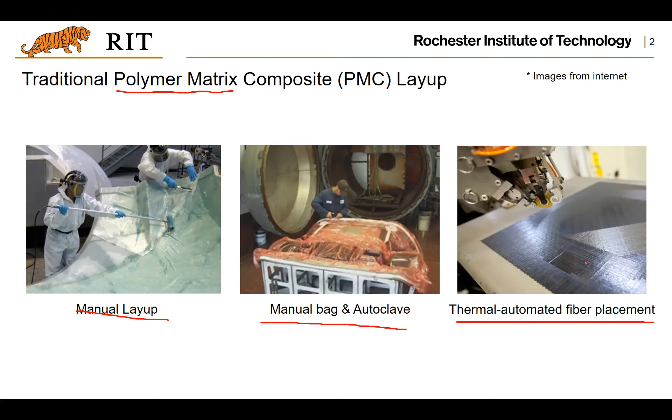Here shows you a thermal composite automated fiber placement. As you can see here, the robot is placing the fibers onto the substrate or the base material, base part.

But that's really difficult for making larger parts like the one shown here. Can you imagine there is a giant robot to do such a placement? That's not possible. And also there are other limitations for this automated fiber placement.

First of all, it only allows the placement of the fibers with limited turning radius, usually 20 to 100 centimeters.

Also, it is only useful for a simple core-skin geometry like the one shown here. That means it requires a core, right? Basically, you are wrapping the fibers onto the core.

But how about those components with a more bulk shape like the one shown here? That's difficult to make using that kind of placement. Basically, automated fiber placement is kind of wrapping the fibers onto some existing core. That indicates its limitation actually.

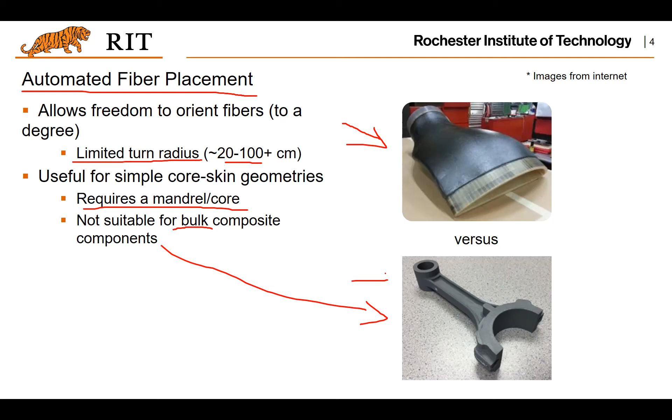So you cannot do parts, something like—where's my mouse? Yeah, okay, something like this. So that motivates the additive manufacturing based fiber placement.

But before that, let's look at some of the early work, which is the additive manufacturing of the cores. So as you can see here, these are the cores used in the automated fiber placement. Basically, you will need to wrap the fibers onto these cores, just a rough illustration like this.

And there are different types of cores. First of all, we have the washout cores. Basically, from the name, you can tell that that is removable, water-soluble 3D printed cores. So the material can be dissolved in water. Basically, you just print it and wrap the fiber on it, and then you could wash it out.

So that's the washout cores. And there are breakaway cores, and those cores could be manually removed after the wrapping of the fibers.

And there are other cores like these structural cores. Basically, these structural cores have very good mechanical property, strength and tensile stress, such that you can leave it inside the part. You don't need to remove it, and this kind of structural shape can be produced by additive manufacturing, and we can go through some details in later slides. Any questions so far?

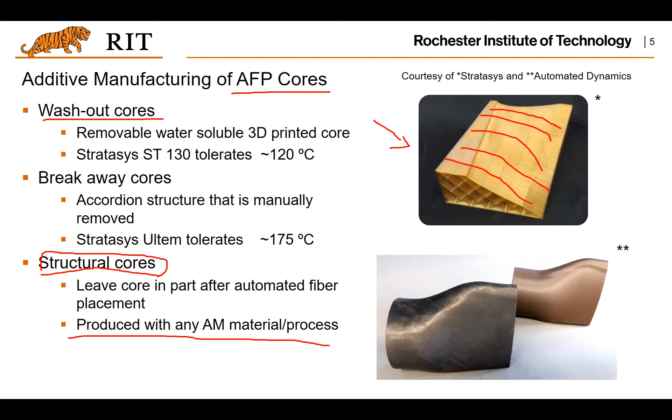No? Okay, good. Yeah, again, the structural geometries—I would say the most popular one is the so-called engineered lattice structure. As you can see here, this is a typical engineered lattice structure. Actually, it's the I-beam, and it is the alternative to the honeycomb cores.

And basically, there are different strut cross-section geometries. And in this kind of structure, this basic strut geometry will be repeated, and it repeats itself and forms a structural shape.

And here shows you some applications. Basically, you can embed these structures inside a geometry as the skin, and the interior structure together with the exterior skin will work together for a part. It has a long history for such kind of structure to be embedded in a given geometry.

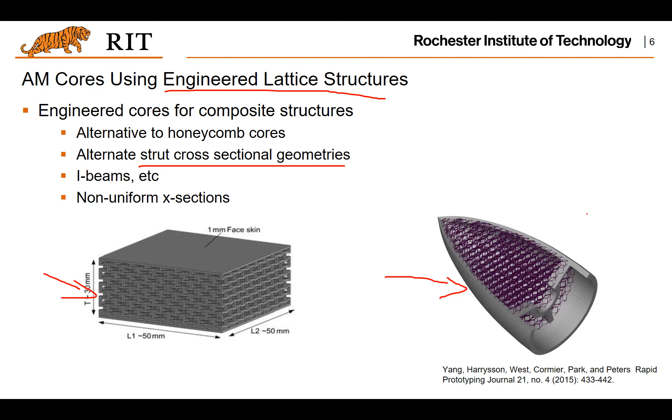Also, there are different unit cell geometries. Again, these cells repeat themselves to form a larger structure. And as you can see here, all different kinds of geometry are here. It could be utilized in many different applications.

And the mechanical property of such a lattice structure are governed by several factors, such as the geometry, right? Actually, it's the most important thing for these engineered lattice structures. So different cell geometry will give you different material property.

Also, the diameter or shape—by principle, if you have a thicker diameter for the strut, it will have a better mechanical property. Another parameter is the angles. You can make changes, for example, like this I-beam. You can change these angles, and by changing these, that could make a difference in terms of the mechanical property, and so on and so forth.

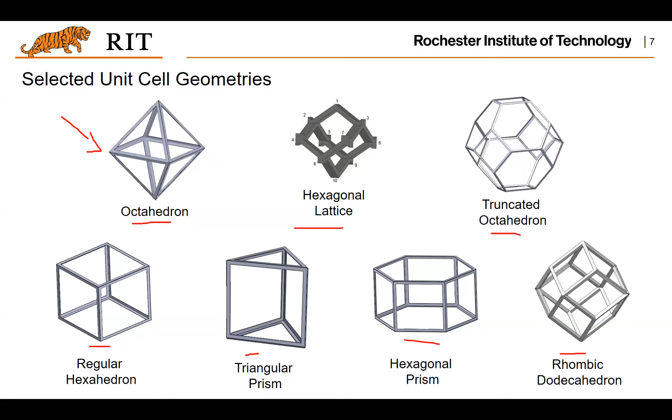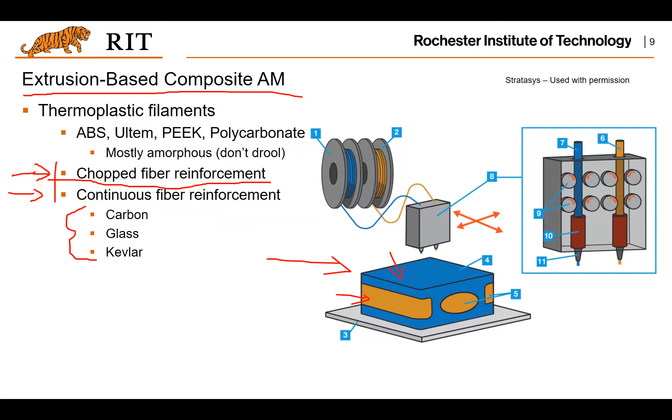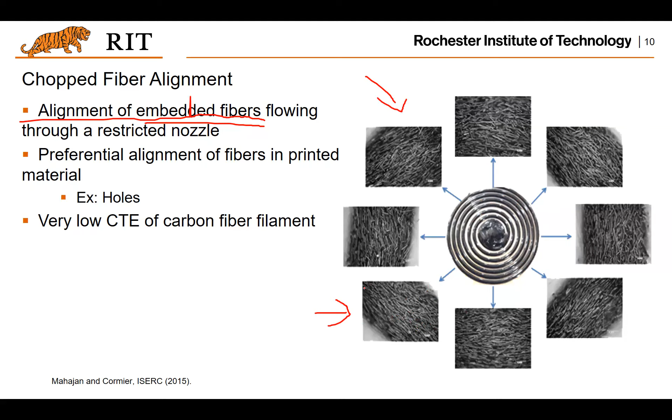If you zoom in, just imagine you can see through, you will see all these fibers are aligned with how the nozzle moves to create the shape. But if we look at this illustration again, it shows you how it is embedded. So then another question is how you're going to distribute the fiber, and also how you're going to decide what is the direction for the fiber to be aligned.

That is actually very important in terms of the mechanical property of the parts. But before that, there's another thing you want to be aware of: the critical fiber length. Why is this critical? Because it decides the minimum length of the fiber, such that if the actual fiber length is less than this critical length, the fiber will pull out of the matrix rather than breaking.

Because you have mixed two different materials together, you have the thermoplastic as the base and the fiber to be embedded in the base. How do you make them attach and adhere together, especially when load is applied? So you need to compute a length and make sure the fiber length is greater than or at least equal to this length, such that when you apply the load, the fiber will not be pulled out from the base material. That's the idea.

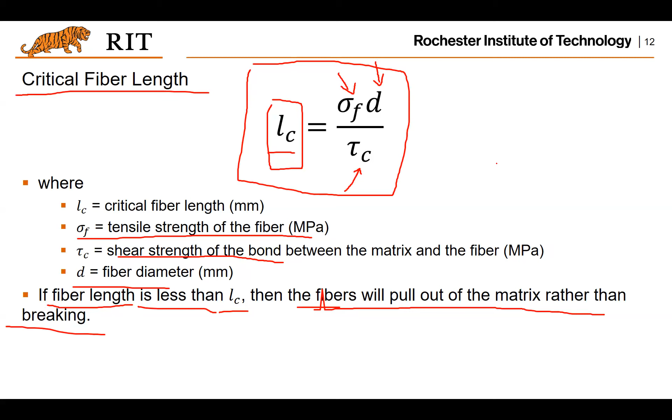Okay, let's move on. Another important thing is the orientation of the fibers, as I mentioned previously. Let's say this is the tensile axis, meaning the load will be applied along this axis. And the fibers are parallel to this tensile axis.

Then you will have the combined stiffness of the two materials' stiffness — the thermoplastic's elastic modulus and the fiber's elastic modulus — and you need to weight them with the volume fractions, meaning the ratio of the volume for both the thermoplastic material and the fiber material. That's how you get the overall elastic modulus, which is related to the stiffness of the composite material.

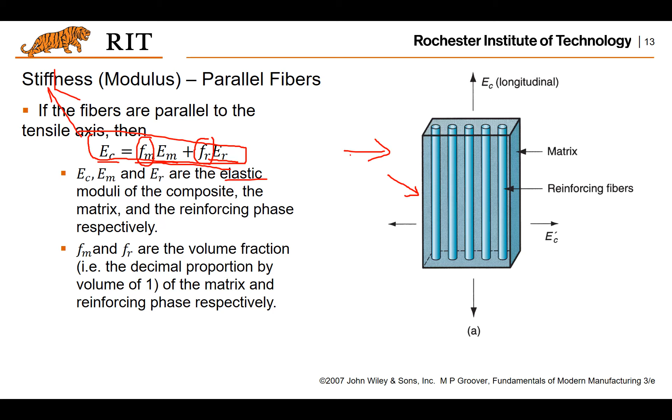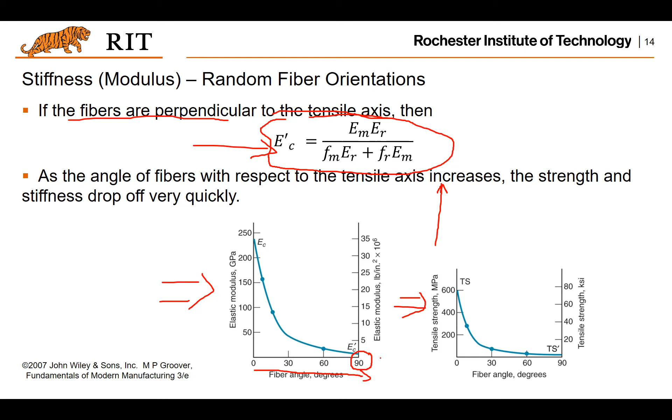So you need to be very careful when deciding the fiber orientation during the process. For example, if you have a turbine blade, you obviously want the tensile load axis to be like this, meaning you want your fiber oriented in this way as well. That gives you the suggestion of how to move your nozzle, because you want to align the chopped fiber orientation with the tensile axis. So can you tell me what's the way to move your nozzle when you build it? What's the building direction? Any idea?

Okay, so let's say you have the part like this, and you want your fiber to be oriented along this axis as well. That means you want to move your nozzle in this way too. So you can never build your part — let me redraw it, it looks a little messy. What I'm drawing are layers, just an illustration. That means you cannot build your part with the layers oriented like this. Instead, you want to build your part with the layers like this. Then the chopped fibers will be oriented along the tensile axis. Now you get it? Get it?

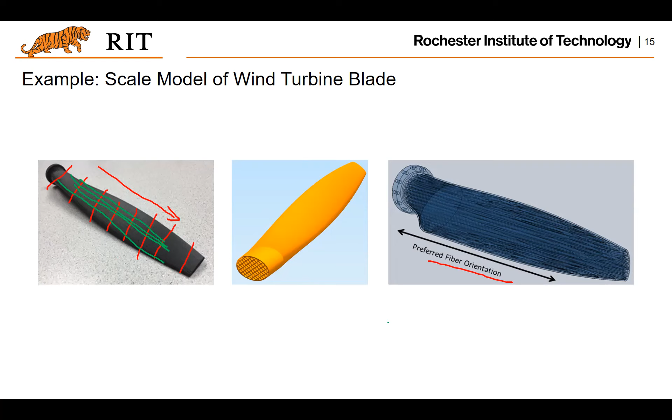Any other question regarding this? Okay, good. I mean, that's the thing you want to keep in mind if you have such an application.

Basically, this could be realized using the BAAM process, which is the big area additive manufacturing, where chopped carbon fiber together with the plastic pellet are mixed together during the process. Putting them together, you could build a big part with good tensile strength.

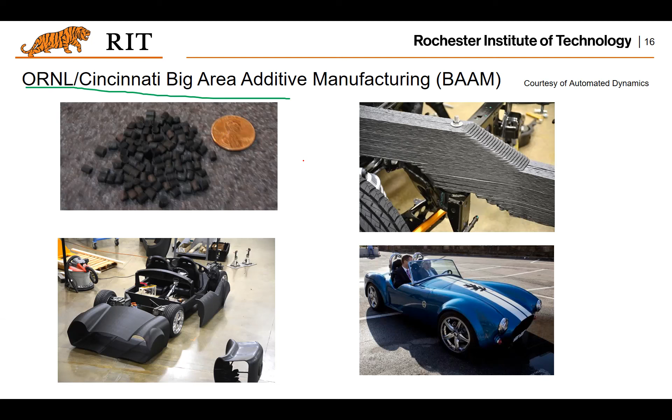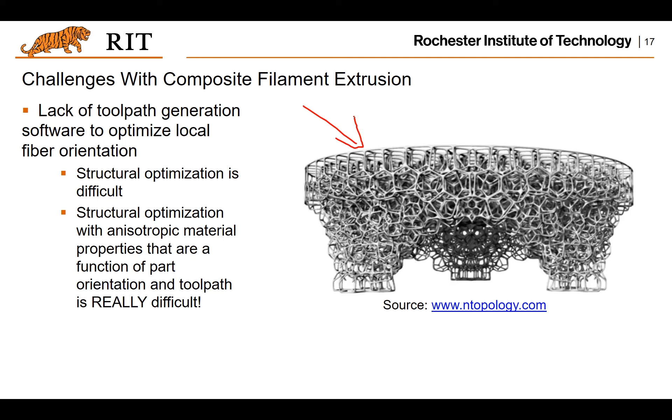Then how are you going to generate a tool path such that you have the best tensile strength? After all, what you can only do is run software optimizations, analysis software to figure out the stress distribution, right?

So in our case, that means you could make some fibers, put some fibers along this orientation during the process, and this will be reinforced to make sure it will not be broken if the load is applied this way. So that's how you could decide the fiber orientation.

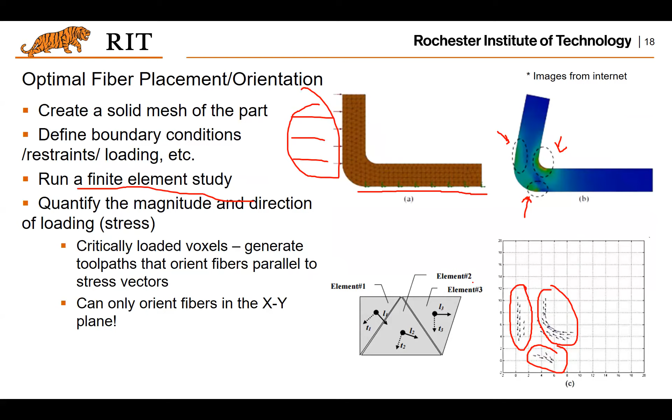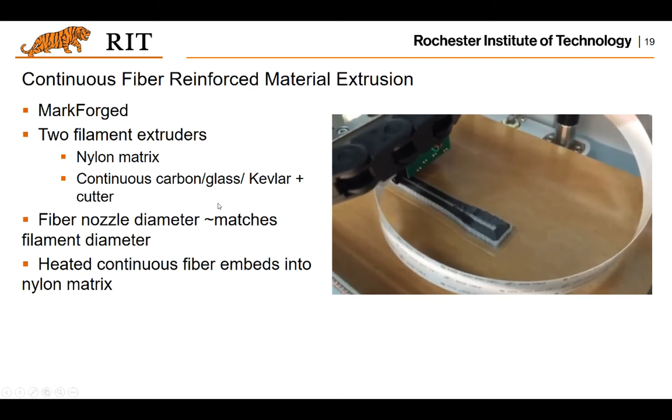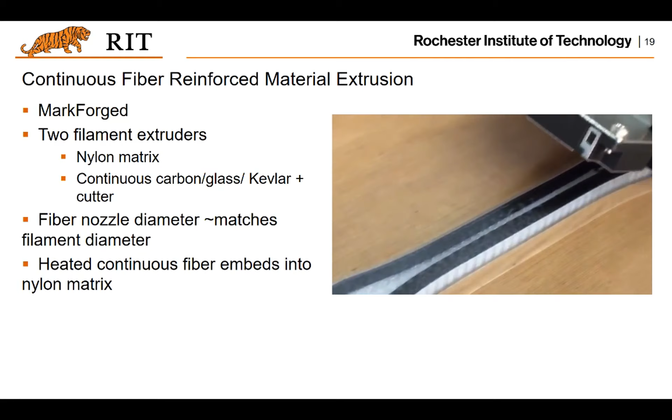And there will be a cutter after the embedment of the fiber is completed. The cutter will cut the fiber, and that's the way you could embed those continuous fibers during the printing process.

But this is not perfect. It only allows a very small turning radius, and the printing speed is very slow compared with automated tape layup. Because it has a small turning radius, compared to traditional auto tape layup, the Markforged process has very little advantage.

And also, again, it only works for 2D, right? Basically it embeds the fiber for each of the layers. So how about if you want to place your fiber along the z-axis? That will make this process have no possibility to achieve it.

And Markforged makes the process and their software closed to the users. That means you cannot really see how the G-code will look like and make changes to the G-code such that you could customize the tool path or fiber placement. I think the reason for them to do so is this process is not that robust if they allow you to make changes to the orientations of the fibers as well as the turning angles. So overall, it is still in the preliminary stage for this process.

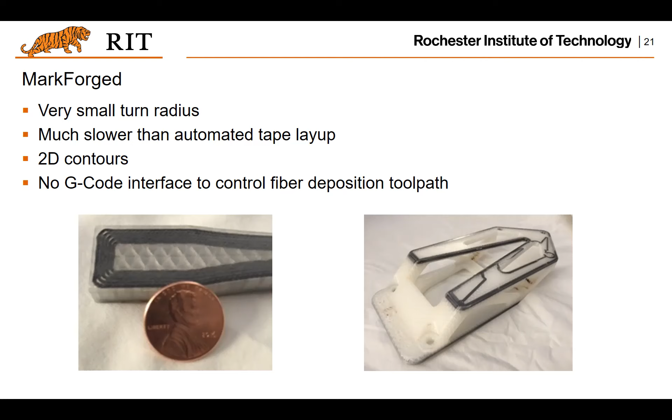So this is another process which embeds metal wires—in this case, copper wires—into the thermoplastic base. If you look at the part after this layer is completed, what you will see is copper wires embedded there. It's very preliminary, but the idea is similar to what Markforged does: print some base material and embed the wires into this layer. Then there will be a cutter, or you manually cut it, and then do the second layer, and so on and so forth.

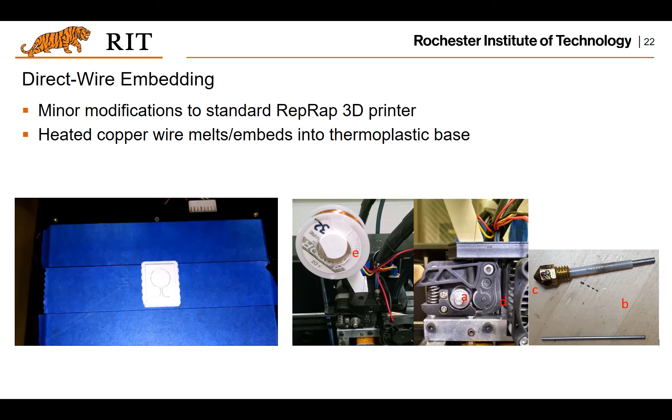So there are some other processes to also address the challenges of such a process. The biggest challenge here is the interlayer adhesion—meaning the bonding of the interlayer is not that good, especially for amorphous thermoplastics.

So this company basically came up with a solution: they have carbon nanotubes embedded during the process, and another step where microwave energy is applied during extrusion to fuse the material with the carbon nanotube together, such that the bonding between layers will be improved. According to their statement, this is how they work.

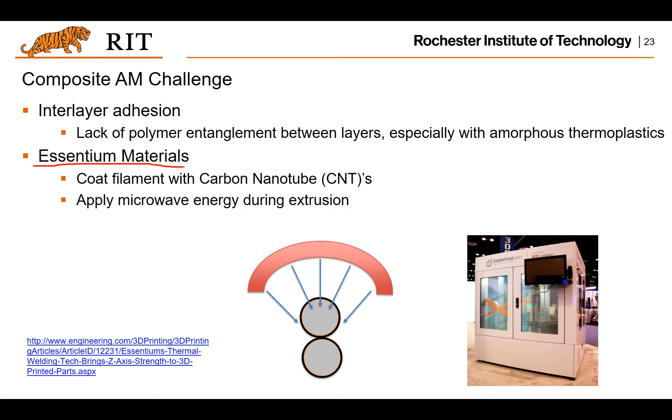So the current frontier, or the cutting edge technology, is the non-planar deposition. As we mentioned, for those complex geometry 3D shapes, the layer-by-layer process cannot satisfy the need to first create the geometry, and second, to place the chopped fibers or continuous fibers into the geometry. So the idea would be: how about we go with a non-planar process, something like this.

Let's look at the challenge first. If you look at this figure, here are some lattice structures—pyramid structures. Just imagine if you use the conventional AM process to produce it. For each of these struts, you are actually creating the geometry layer by layer, one after another. It has very poor interlayer adhesion because only part of the area will overlap between different layers.

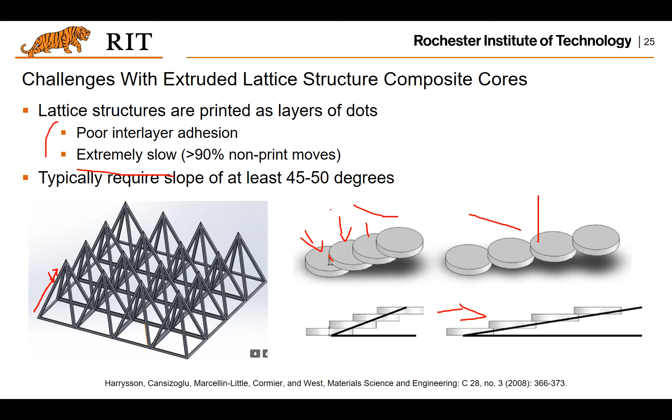So actually that is what people are looking at. This company is called Branch Technology, and they are making large size parts, like house or home constructions. They use robots to extrude these materials and structures. As the robot has multiple degrees of freedom, they will extrude those struts along its axis.

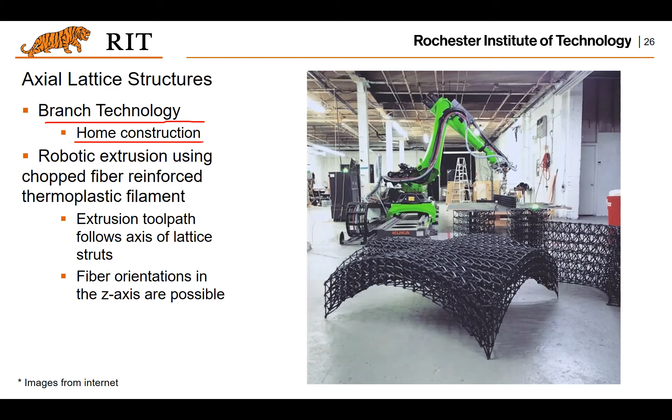It also enables fiber placement—meaning the orientation of the fiber placement is not just in the XY plane, but also in space, in the Z direction, or in any 3D direction, just by extruding along the axis of the lattice struts. So they are able to create geometry like this at a larger scale compared to most 3D printing processes.

Actually, there are some challenges for the process. The first one is slumping—meaning if you print one axis and then another, how do you prevent it from falling down during this process? To prevent this slumping, you probably want to cool down what you just printed before you print another part to join them together, so you want to do the cooling during the process. That's another challenge.

The third challenge is the collision of the nozzle with the previously printed part. I will show you some figures so you can better understand how these collisions could occur.

So let's look at this illustration. If you have an extruder like this and you want to print those struts, first you print a filament onto the platform, and then you extrude your part in this direction. At the same time, cold air is applied to cool down the part and make it solidify. It keeps cooling this part to make it stronger while the extruder is printing another bar to form this geometry. Turns out you will have some lattice structure or some pyramid structure created.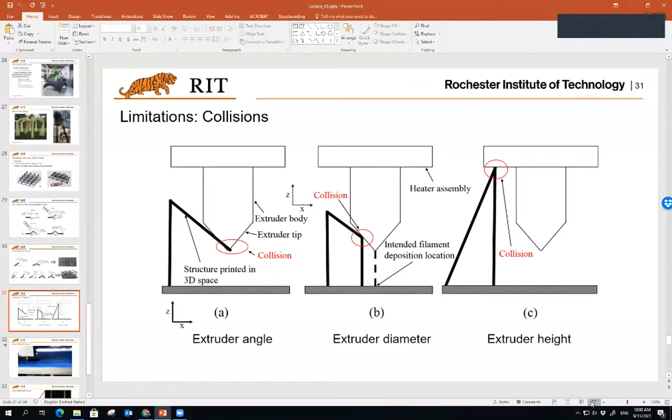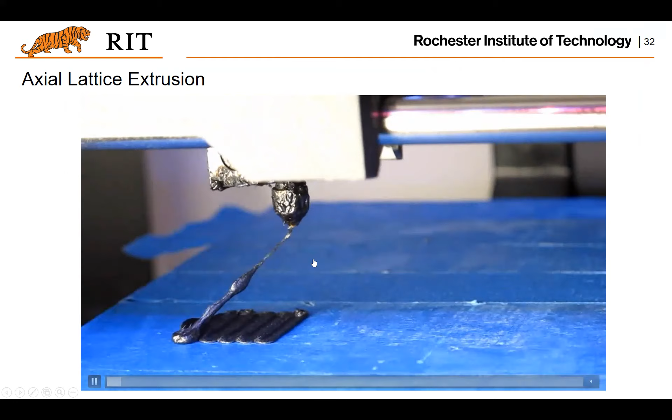All right, let's continue. So what this could be realized, as I mentioned, is doing this kind of multi-pass process instead of continuously moving your nozzle to create this geometry.

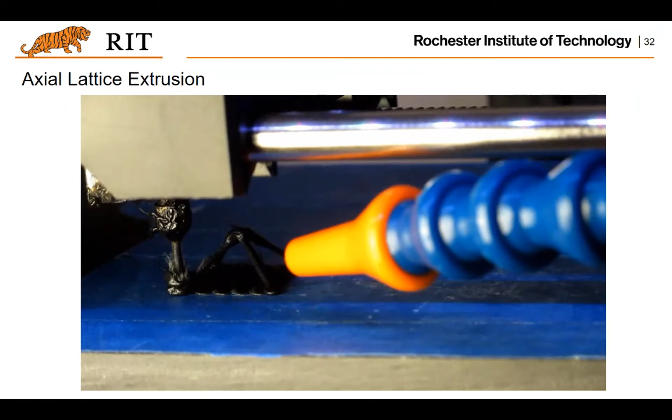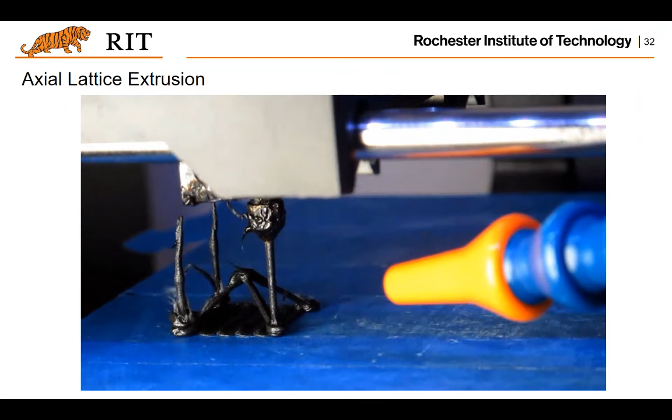As you can see here, this printer is creating a complete unit cell, and it always goes ascending instead of descending. During the process, there's always cool air applied to solidify the printed strut.

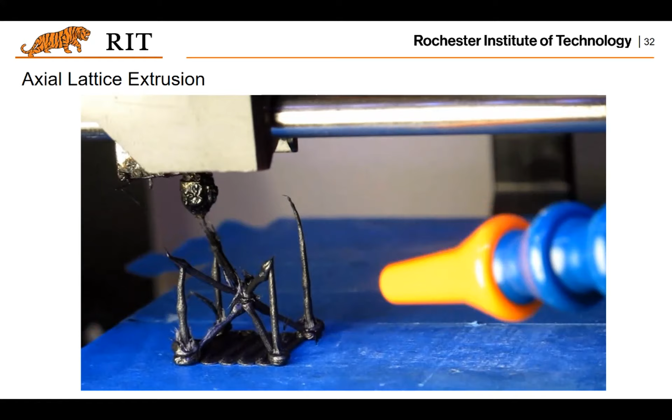I think this video was taken by Dennis Cormier's students, and this shows how this process is creating some lattice structures as well as a skin.

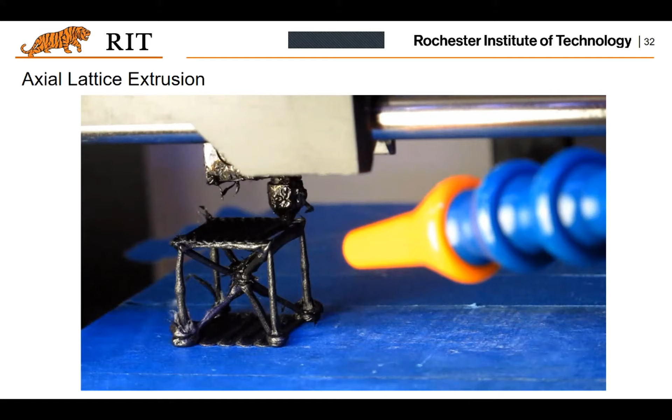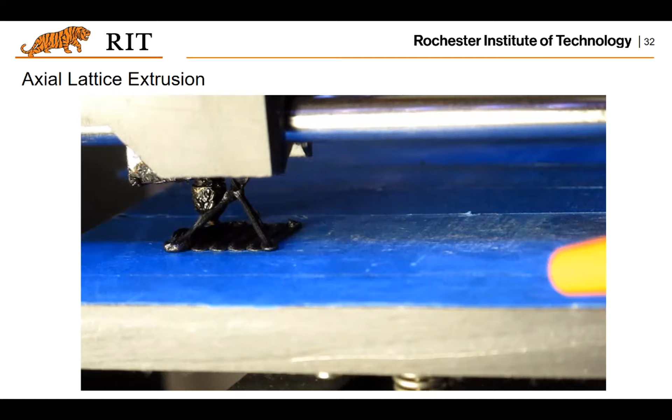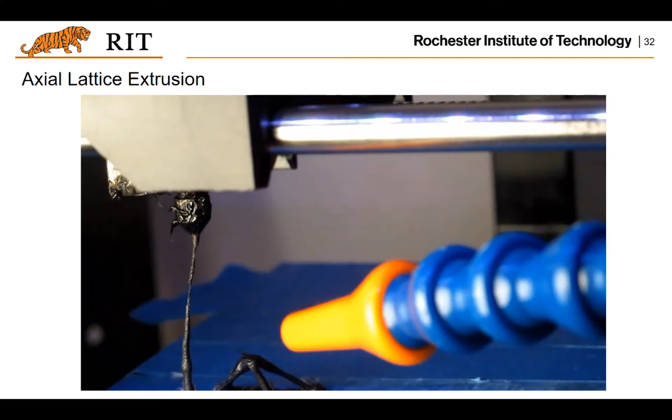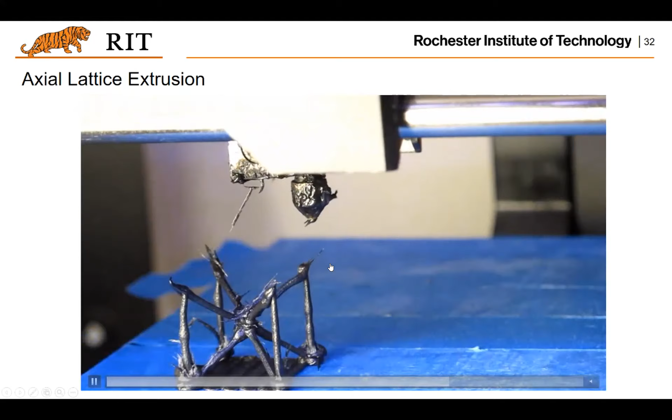I'm curious if the cool air is provided automatically or manually. I think in this case it's not an automatic process, but definitely it's possible to provide it. I think right now they make this automated, but when taking this video it was not. And it's not difficult to make it automated - basically what you want to do is attach this part with your nozzle, and in the control side, just decide once one bar is created, let the cool air out onto the parts. That's how it could be automated.

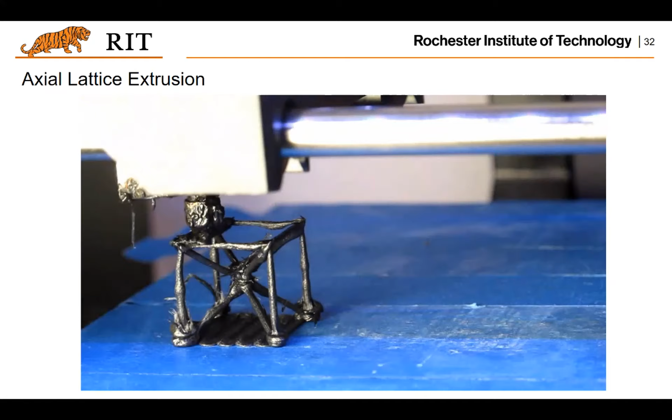So as you can see here, the orientation of the fiber - if you look at this zoom-in view, you can see it is perfectly aligned with how you move your nozzle, which is the direction of this axis of the bar. And that achieves our requirement.

And if you compare the printing time for these examples, as you can see here, this axial lattice extrusion is much faster than the conventional fused deposition modeling.

For printing, two examples: one is a 3x3x1 lattice, another one is a 3x3x3 lattice block. That's how you should think of this new process compared to fused deposition modeling, the conventional one, when printing these engineered lattice structures.

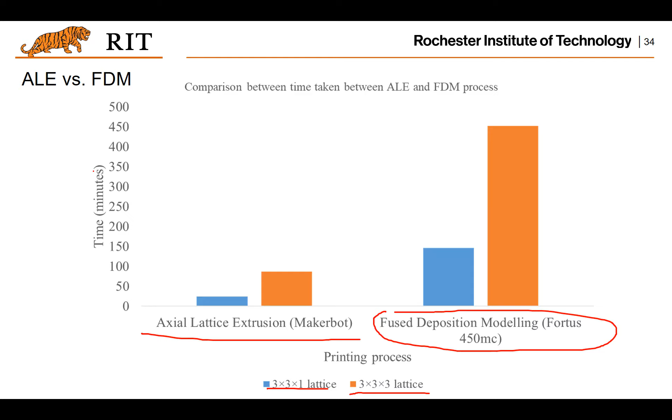I think we have completed the introduction of the material extrusion process. Let's talk about some of the computational aspects of material extrusion, which actually are universal for many processes, regardless of what kind of process we are looking at. So let's look at some of the basics.

The first one is the 3D printing file format. In your first two labs, you played with the STL file, which is what you use for slicing, and it's necessary to take a closer look at this file. An STL file contains tons of polygon patches, more specifically triangles. These triangles are an approximation of the original geometry, and the process to get them is called tessellation.

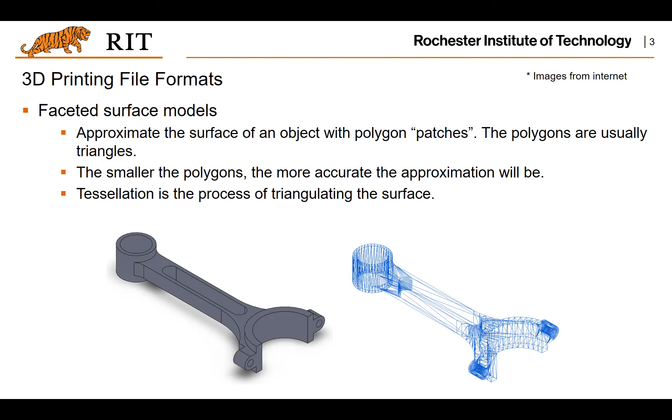If you open an ASCII STL file, you'll see lines of text like this. You have the keyword 'solid', followed by the file name. Then the next lower level is 'facet', with the facet normal listed here. Then you have the three vertices, the coordinates forming this triangle facet. Afterwards, you have the keywords 'end loop' and 'end facet', completing one triangle on the model. You repeat this for each triangle on the model.

After all the triangles, you have another keyword, 'end solid'. In that case, you just complete the ASCII format of an STL file for a model.

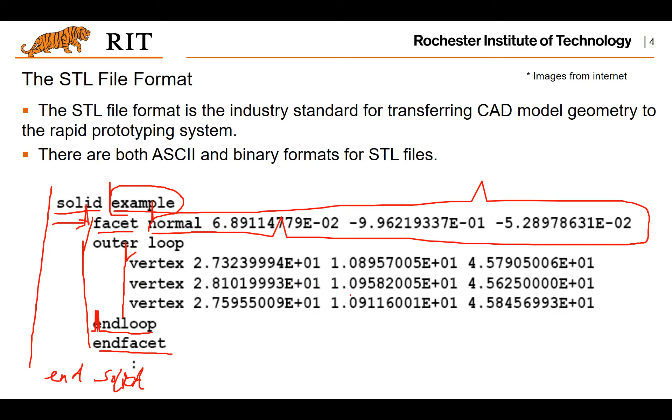For an STL file, as mentioned, it describes each triangle forming the whole geometry, and the vertices for each triangle facet are listed in counterclockwise direction. The reason for this counterclockwise direction is that you can easily use the right-hand rule: your fingers follow the sequence of vertices, and your thumb will point outward from the part volume. That's why you have this sequence of vertices in this direction.

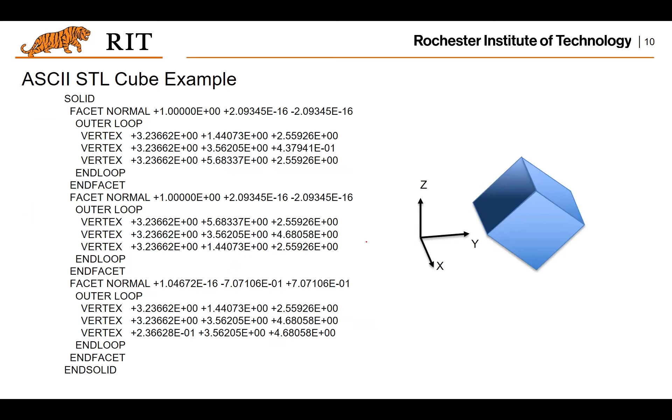As I mentioned, the STL file is just an approximation of the geometry. Why? Because it has all the triangles stored in the STL file, which is just a linear approximation of the original surface.

So if we look at this illustration figure, we're actually looking at a surface, but it's not possible to show a surface on a slide. So we use a curve to mimic the case of the surface. Imagine this curve is your surface, and these straight line segments are the triangle facets.

We are using those triangles to approximate the original surface, and there will definitely be a shape approximation error. For the 2D curve case, you use this distance over this chord, and then you get some understanding of how far this line segment is from the original curve.

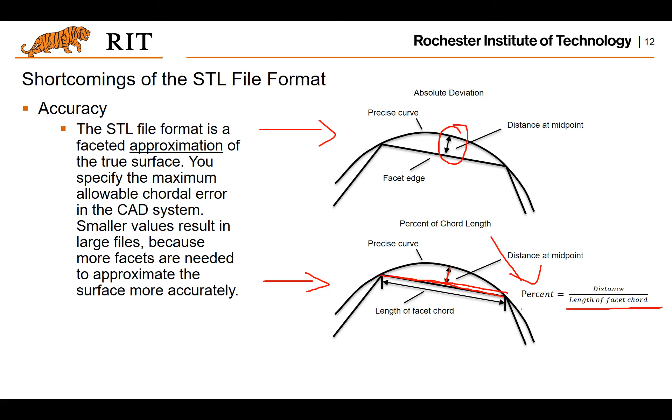That's how you compute the shape approximation error for a line segment relative to the original curve. Similarly for the surface, you compute the distance from the center of the triangle to the original surface. Then you have this error, and you could also compute the radius of curvature. Using this distance over the radius of curvature, you get the shape approximation error, which is a bit complicated, but you don't need to know how to compute it—just understand you're looking at a linear approximation of the original surface.

If you are using an STL file, there will be some error. You definitely want to keep that in mind, because sometimes the error is too large, and there will be problems if you just use the STL file to create the shape. If that's the case, you want to reduce the error by increasing the shape refinement when you export your STL file—meaning more triangular faces to approximate the original surface. You always need to find a balance between file complexity and shape approximation error.

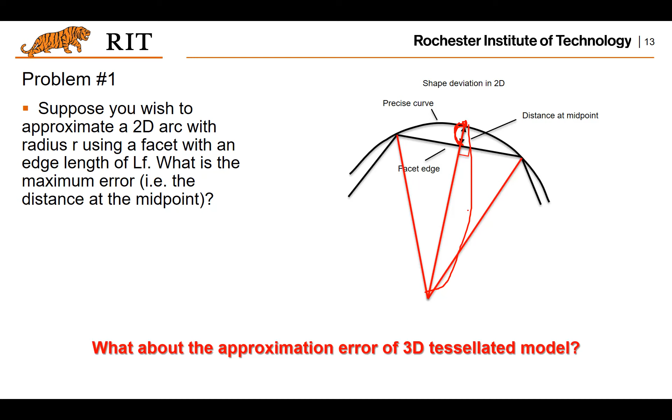It again depends on your applications. Yeah, okay, thank you. So just keep that in mind—that will somehow affect your decision making when you export your part from the CAD software.

If you have some way to share this information, you don't actually need to repeat it for each facet. For example, if we look at a model with...

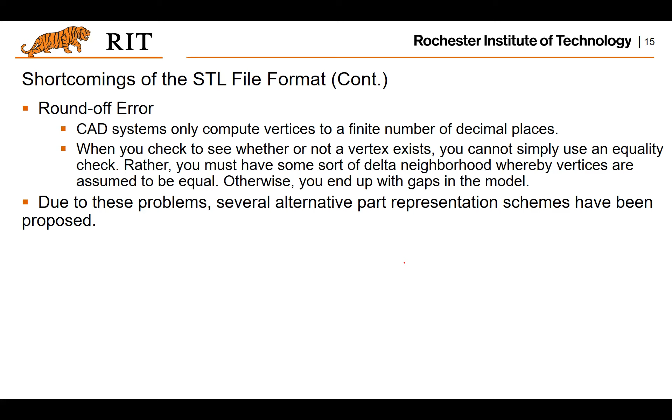And that's why there are more other alternatives than STL file adopted in many applications. As I mentioned, there are round-off errors because of the shape approximation, and that is another problem for the STL file as well.

And that's why these file formats will be used for such a color printing process: VRML, OBJ, and PLY files. All of these file formats support color information to be stored.

And then we come to another topic, the transformation of the geometry. This is very important, especially for slicing. You want to move or rotate the part to get the best orientation for slicing, and sometimes you want to scale the virtual file down or up to get a different size of the printed object. There's also other issues, like the axis convention.

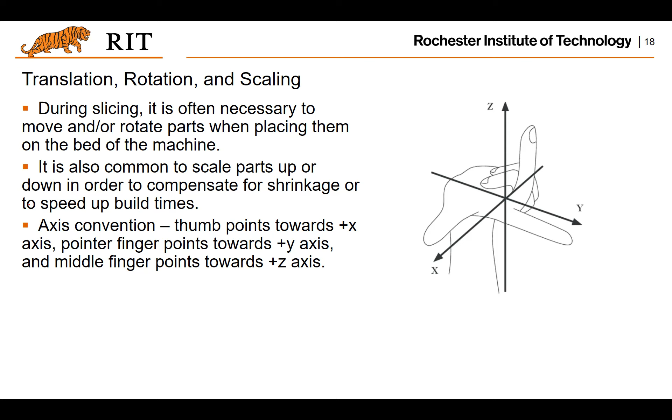But actually, these kinds of translation, rotation, and scaling can easily be done using matrix multiplication. For the details of matrix multiplication, you could find them through math or linear algebra lectures online, but you just want to keep the simplest understanding of it.

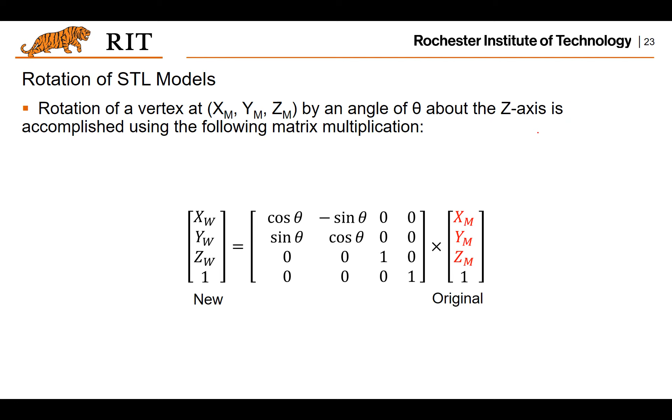And the scaling, right? So basically you have a scale factor in different directions, and you could easily put it along this diagonal, and each of the components of the factor gives you the scaling factor for the x, y, and z directions. That's a scaling matrix.

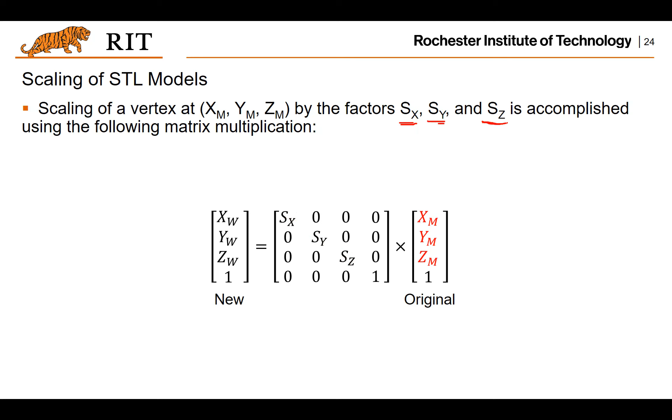Let's look at one example. If we have a point (0, 0, 1), and we want to translate it 5 units in the y direction, and then rotate this point by an angle of 90 degrees along the x-axis, what will be the new coordinate?

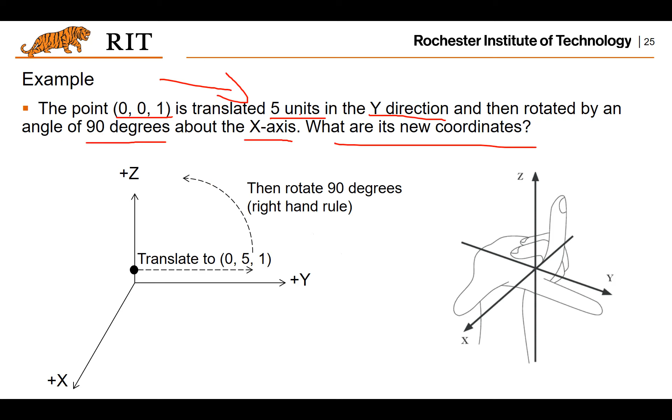What you want to do is follow the order and figure out the matrices associated with these operations. The first one is translation, 5 units. This is for x, y, and z — for x and z, nothing, but 5 units along the y direction. Put 5 here, and keep the rest as is: all the diagonals are 1, and all the rest are 0.

Use this translation matrix times your point. What is your point? (0, 0, 1), so (0, 0, 1), and leave the 1 here — this does not change. It turns out you will have your final matrix.

The position after this translation is (0, 5, 1), and then do the rotation. It is a rotation along the x-axis. Plug in those numbers to the matrix at the right places, then apply this rotational matrix to the translated position, which is the result from here. It turns out you will have the final position of this point, which is (0, -1, 5).

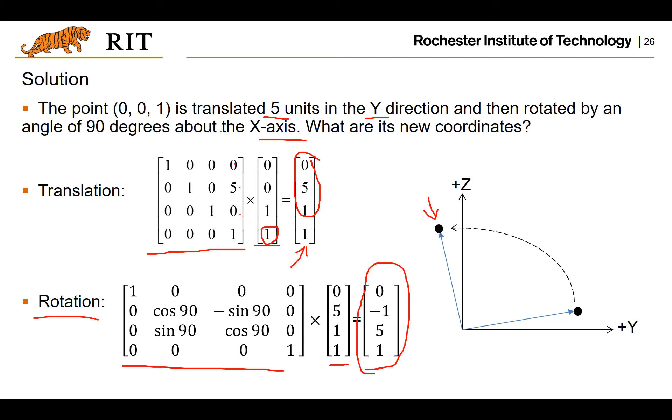So sometimes you can just have a concatenated, composited matrix. That is, you multiply each of the transformation matrices together and form an overall transformation matrix, which is called the concatenation matrix in this case.

You just follow the sequence of the transformations. For example, in this case, the translation matrix will be placed rightmost, and then if another rotation happens, you put it on the left-hand side of your first transformation. If there's another rotation, scaling, or translation, you keep multiplying your matrices based on the sequence of transformations.

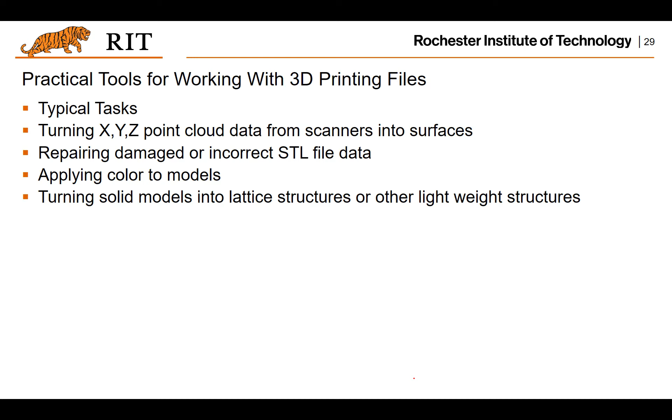Basically, it provides a rich library of mesh-based operations. This is for mesh, not for CAD files. You have to have a mesh file format first, like OBJ, STL, or PLY. What you could do is repair it by filling holes, and also do some mesh editing, mesh sculpting or cutting, mirroring, or mesh composition, meaning you take one part from one model and another part from another model and mix the two together to form a single model, something like this. Very interesting software.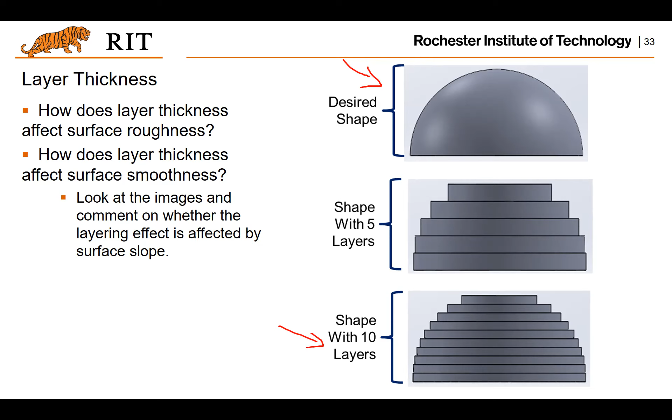But how do you do this slicing? Basically, you are using a plane to cut your model. If you assume the printing is along the z-axis, the plane is something like z equals t, then z equals 2t, 3t, and so on, where t is the layer thickness. If you assume the model is placed on the platform and printing is conducted along that axis, that's the equation for the slicing planes.

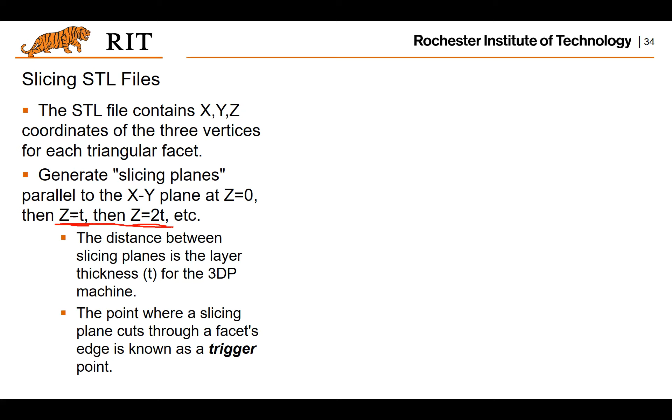So what you want to do is the plane-triangle intersection: figure out the intersection points of one cutting plane with all the triangles on the model. The point where a slicing plane cuts through a facet edge is called the trigger point. There's some illustration later to show how this intersection is computed.

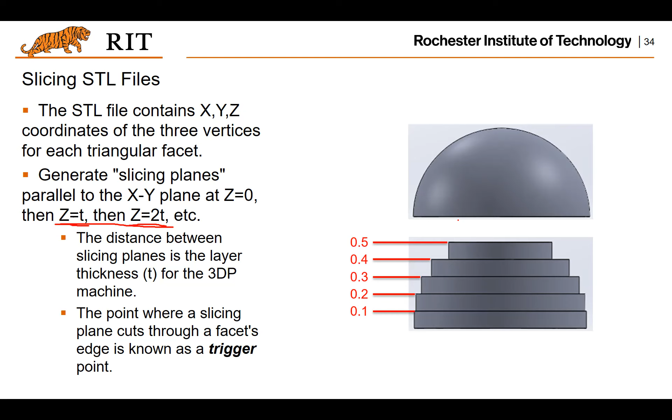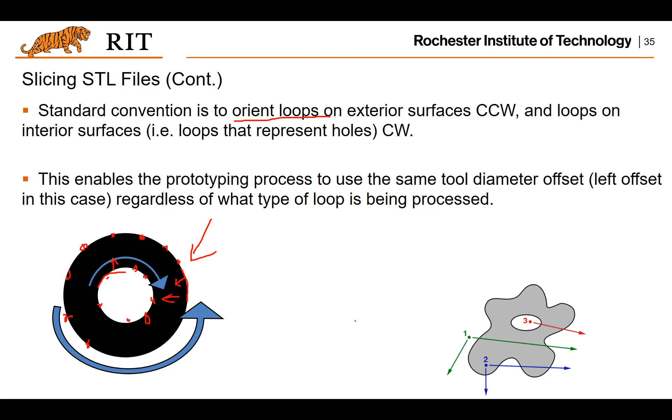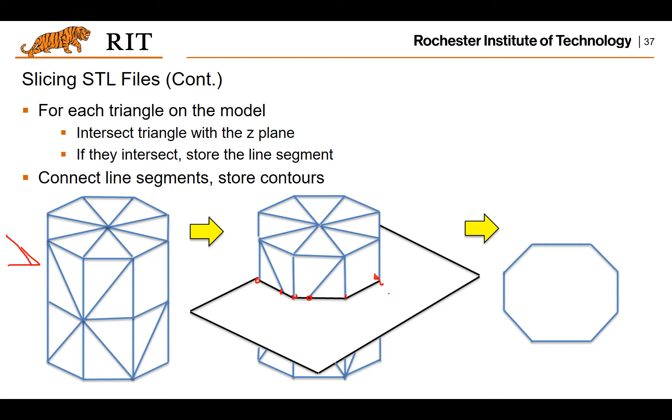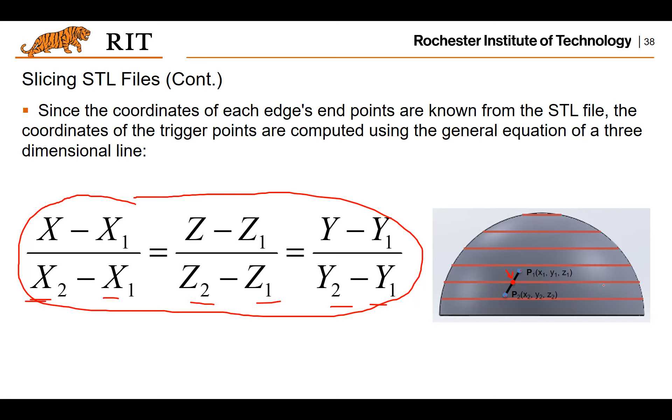The plane equation is z equal to something, the layer thickness at this plane. So you want to combine the two equations together, substitute z into the equation, and then solve for x and y.

That gives the x and y coordinates of the intersection point. Because z is known, that is the current slicing plane height, and the only thing you want to obtain is the x, y position, which can be obtained using these two equations. So that's how you get one intersection point in this case. Any questions so far? All right, good.

So let's take a look at an example. There could be some calculations like this in your homework as well as the quizzes. But let's look at this example first.

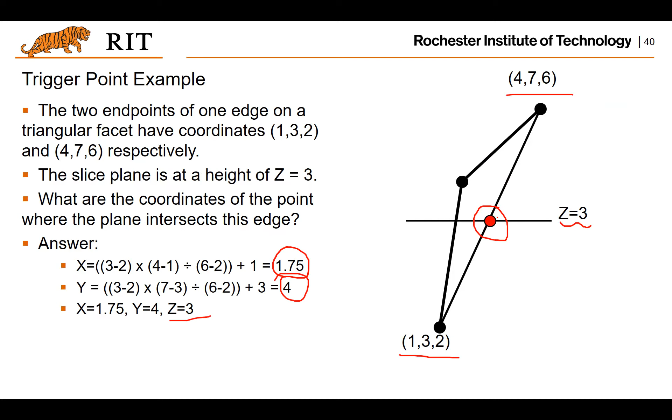Just use the equation on this page and substitute all the values. It turns out this is the x position, y position, and z position of this point. So that's how you compute this. Any questions? All right, good.

Once you have all the trigger points computed, you could have a series of linked points by finding the match, and you end up with a loop, which is a series of trigger points, one by one. Two neighboring trigger points are actually in the same triangle, and that will be used for the following calculation.

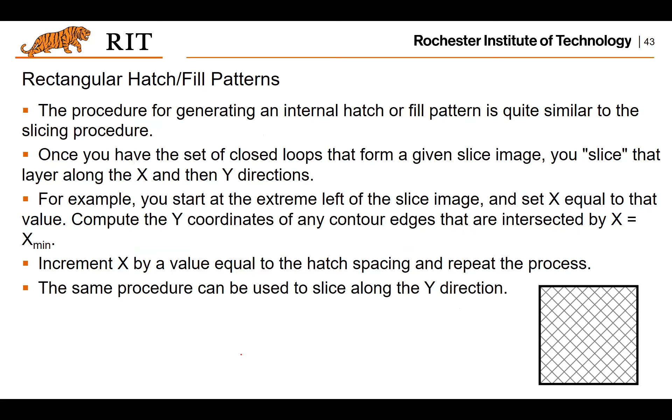For example, you want to create the infill patterns for the contour. The simplest one is the hatch, or the so-called rectangular infill. So for each layer, for each contour, use a series of straight lines, either parallel to the x-axis or parallel to the y-axis, and again compute the intersection.

Then you will have all the intersection points, and it turns out you will have all the infill created.

And that is very useful as well. But first you want to align this bounding box to your X, Y, Z axis.

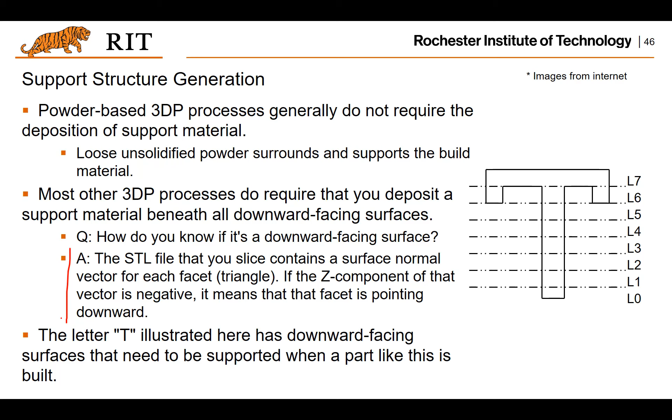And here is a simple algorithm to determine whether support is needed for each layer. It is started from the topmost layer and goes in a top-down sequence from the topmost layer to the bottommost layers.

I don't want to go into details, but you can take a look at this, it's a very interesting algorithm. It works very well, although it could generate more than enough support, but that's the most secure way to support your part.

So sometimes you just want to compute the area of the slice to estimate the material required for a layer. This equation gives you how you compute the area. And this area you want to be aware of.

This area has a sign, meaning there could be a positive area or negative area. The sign will be positive if the given loop is a counterclockwise loop, meaning the exterior loop, that's a boundary loop. It could be negative for clockwise loops, meaning interior holes.

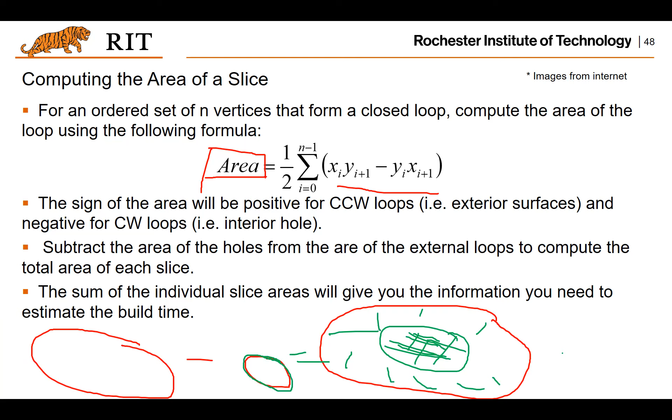So the building volume, I mean the consumed material, could be estimated using the area of each layer. Basically, you sum up the area of all slices. Then you have a total slice area. And with the area and the layer thickness, you can have the overall build volume, right?

But that's not the only volume to be consumed. There will be support material volumes if there is support material. So you also need to estimate that volume as well.

So that's how you build up the estimate of build volume, and that's how you estimate the material cost if you have such a volume, right?

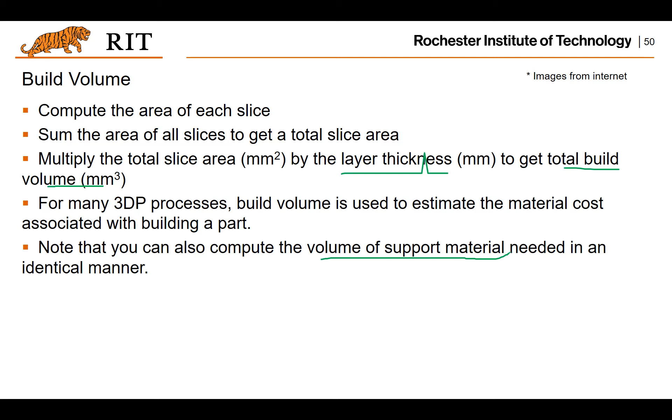Another estimation is the build time, but that's not an easy task. It is process specific, because different material processes have different time for each layer. Also, after building each layer, there could be some delay time between each layer.

Also, there could be some post-processing time for different processes. So it's highly related to what kind of process you are looking at, right?

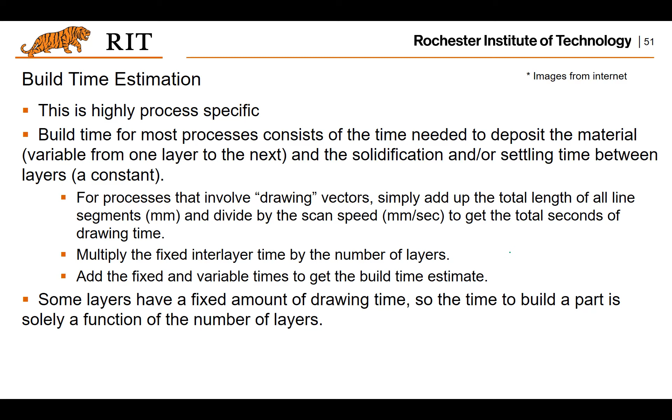The last one is the nesting. That is, for a given build volume of a printer and a given set of models to be printed, how are you going to pack the models such that you could fully utilize the printing volume?